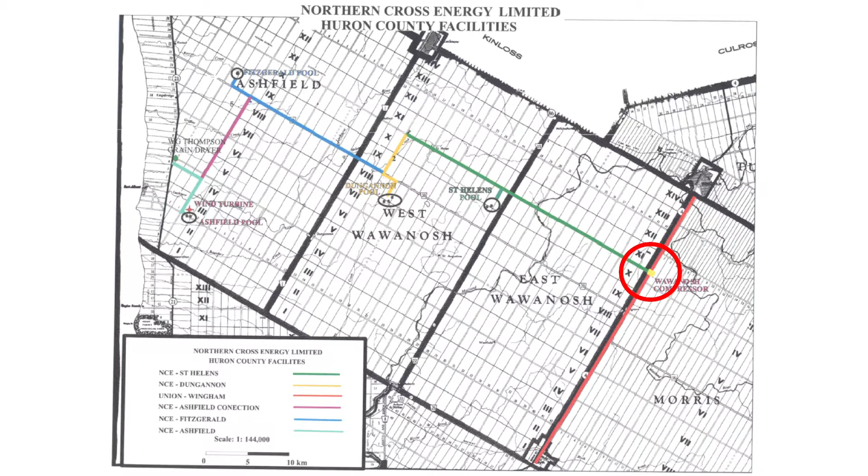It's a two-way metering facility, and we switch depending on the time of year. We do have an end-use customer on our system, which I showed a picture of earlier. What's also interesting is this is the eastern part of Lake Huron, and there's very large-scale wind power development in that area.

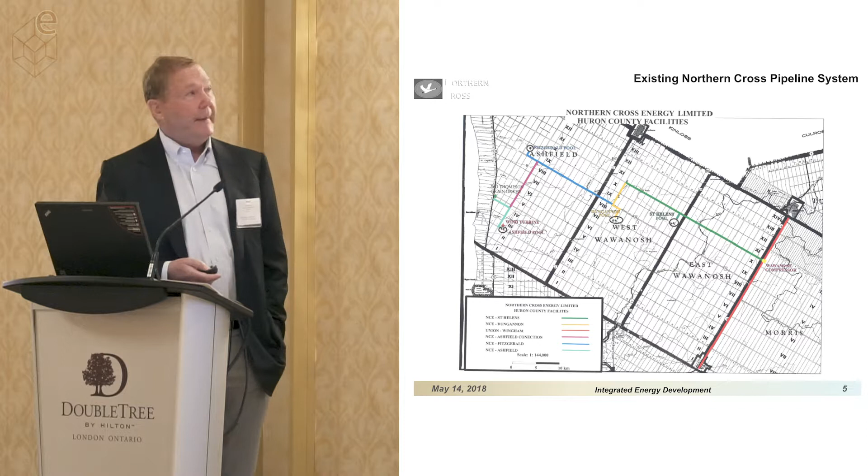So we're in a very large development area for wind power. This is an example of how we can integrate, because Northern Cross was very much involved in the development of wind power in that area. So we're very familiar with intermittent power and renewable energy.

I'll go through this fairly quickly, but we built a cogen in 1992, and that was really as a sales outlet for our gas, because we were islanded. We didn't have other sales outlets, so we thought, well, we've got access to the power grid - we'll take our gas, convert it to electric power, and put it on the grid as a way of marketing our gas. That cogen was one of the first built of its kind in Ontario.

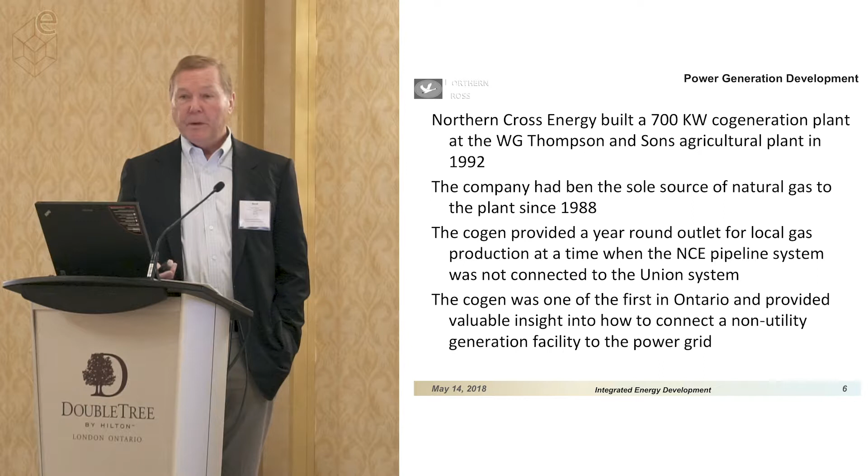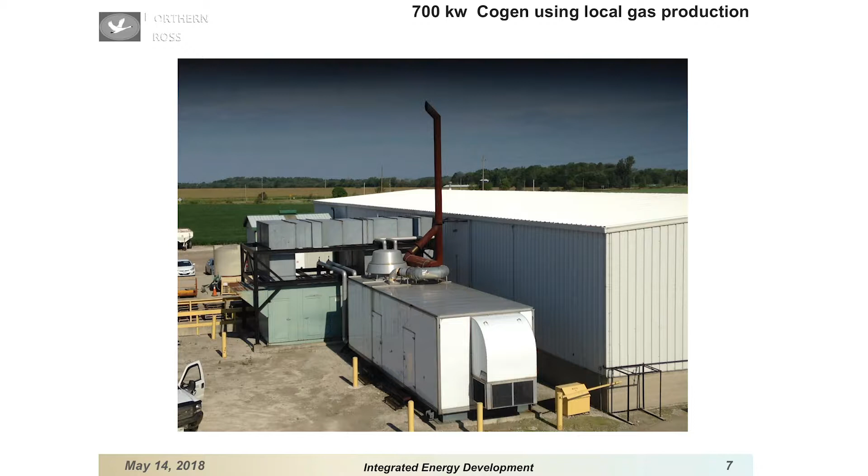It has waste heat recovery, being a cogen, and we gained some insight from building that into how to interface with the electric power grid as opposed to interfacing with the natural gas grid. So that's a picture of the cogen, and it's at the Thompson's - an agricultural processing facility.

Subsequent to that, it became clear to us that there was a growing demand for renewable energy, so we formed an affiliate, Port Albert Wind Farms, and we built what I believe was the first commercial wind turbine in Ontario - not publicly funded. That unit came on stream in 2001 and has been producing for 17 years. So we have some history in the wind power business.

That company was sold to EPCOR in 2005, and the project portfolio that we developed is now a project of about 300 megawatts. So it's a very large wind development, and actually I believe it's the largest wind farm in Canada.

But one thing we found from our experience with the wind business is exactly what we've been hearing about earlier - this is not dispatchable power. In other words, it just shows up. The wind's blowing, the sun's shining, you're getting power whether you need it or not. And initially, people's response to intermittent power was to say, 'Oh, gee, if the wind's not blowing, the sun's not shining, we better build gas-fired generation to back it up.'

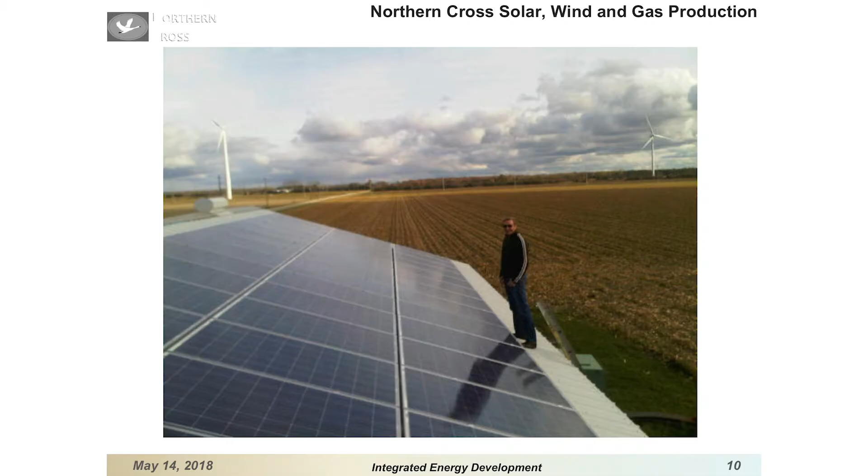So wind and solar development are now common in that area. Very large wind development, quite a bit of solar development along the eastern shore of Lake Huron. There's more than 1,000 megawatts of intermittent power. It's not dispatchable, so you get it whether you want it or not, unless you physically turn off the wind turbines. So there are periodic surpluses, and we've heard about that.

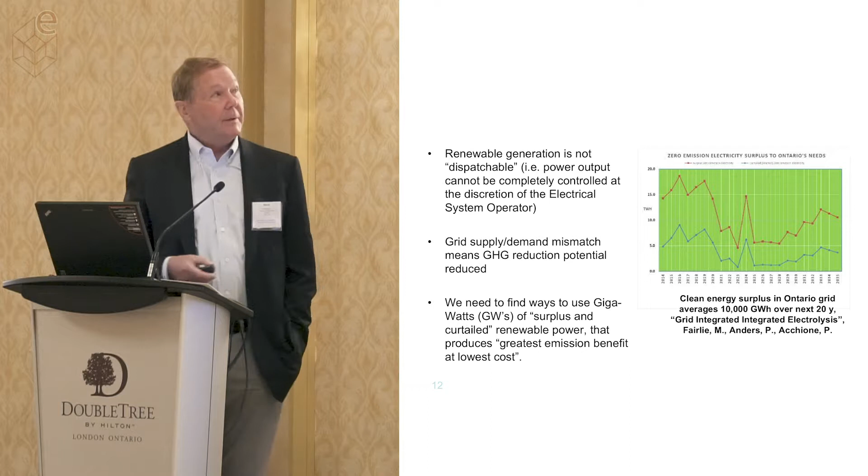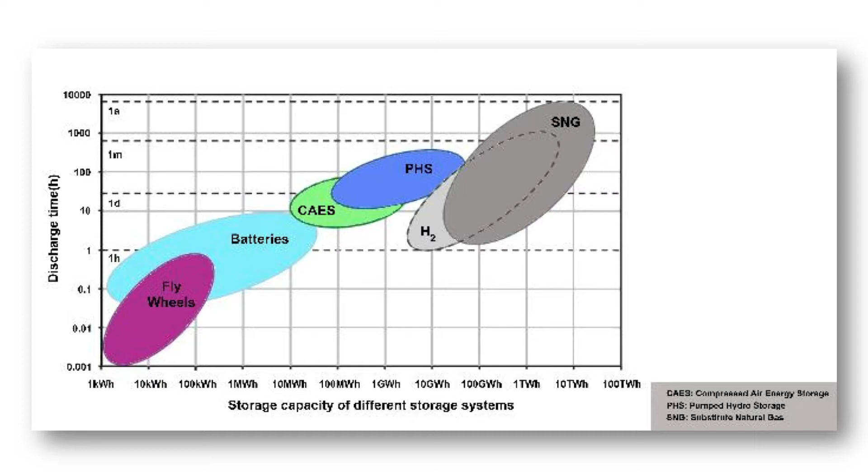Up here: compressed air, pumped hydro. But this sphere in here, which is even larger amounts of energy and longer periods of time, is hydrogen and substitute natural gas. So surplus power can be converted into a gas—either air or hydrogen. And the best way to store that in large quantities is underground, and again, we heard that earlier.

So the two differences really, I think, are: compressed air is a round trip. You take power off the system, you put it back on the system, but the medium is air, which in itself doesn't have any commodity value. I mean, you can't sell air. So you use it as a medium.

Our interest as a producer is the use of porous reservoirs—in other words, we have pinnacle reefs. They are depleted, and if you don't use them for storing natural gas, can you use them for storing hydrogen or for storing air? We know there's quite a bit of work going on with use of porous media instead of salt caverns for storing air, and there's going to be testing and new regs required before you do that. But that's an opportunity we can investigate—repurposing depleted natural gas pools for air storage rather than natural gas storage.

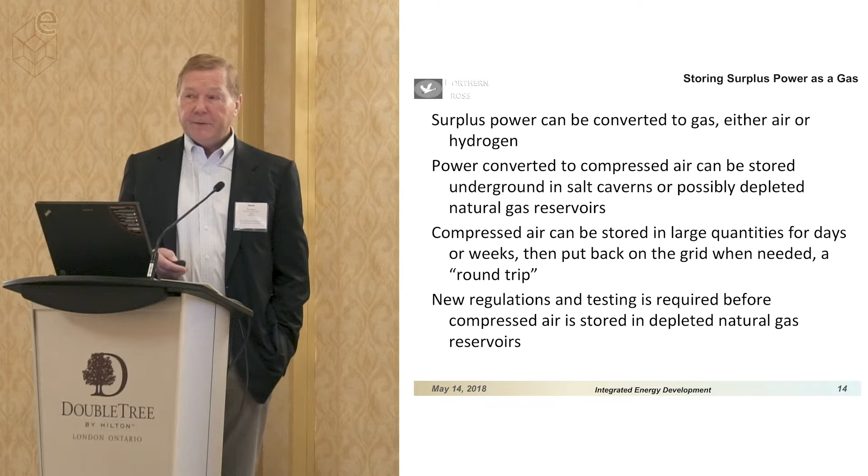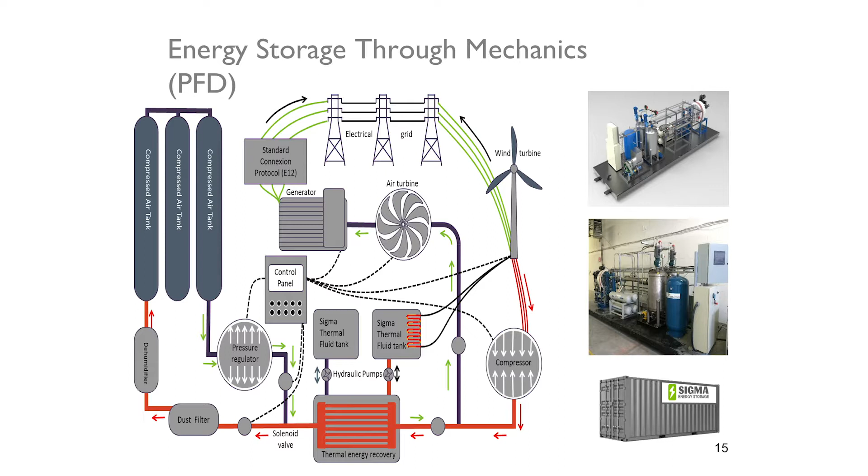This is a schematic of a compressed air system. We saw one earlier, and maybe rather than talk about compressed air, which Eric's done a good job talking about already, I won't get into that. Maybe I'll talk about hydrogen instead, which is a bit more up our alley.

So we can convert surplus power into hydrogen using electrolyzers—they're called water electrolyzers—where you take water and basically separate it into oxygen and hydrogen using electric power.

So we've been developing those over the last number of years and now have commercial units that are in multi-megawatt scale. One of the things we wanted to do, which hadn't been done in the past with large-scale water electrolyzers, is have dynamic response. In other words, they're not designed to run 24/7. You can respond to changes in surplus power and make hydrogen when there's surplus power, and stop making hydrogen when the power is needed for something else.

There are very large hydrogen facilities and industries all over the world, including very large ones in Ontario, mostly in the Sarnia area. The refineries and petrochemical plants use a lot of hydrogen. But interestingly, about 98% of the world's hydrogen is made from fossil fuels. So you take fossil fuels and take out the carbon to recover the hydrogen, but what you're left with is carbon. In separating those from fossil fuels, you get the hydrogen, but your waste product is carbon, which generally goes up the stack, and these are very large sources of greenhouse gas emissions.

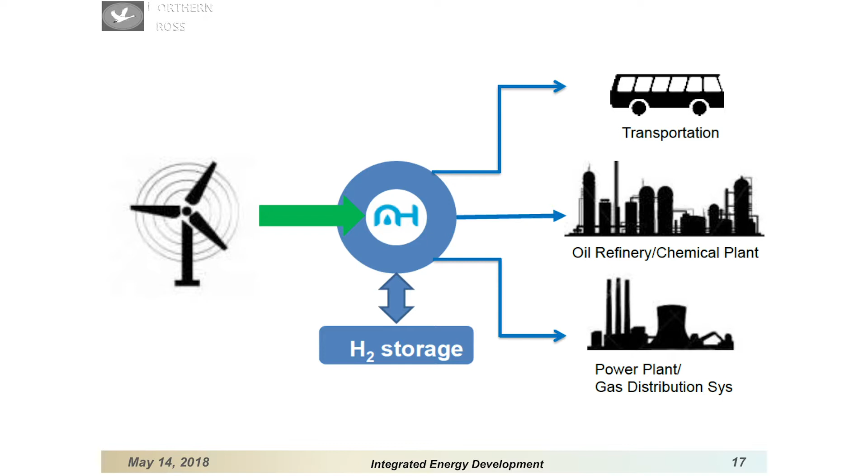So this is the concept that I talked about with wind or solar energy, running it through an electrolyzer, in this case Next Hydrogen, storing it underground, to balance it so you can just use off-peak power and underground hydrogen storage. And then you've got applications for using hydrogen in transportation, refineries, and actually the largest use of hydrogen in the world is for making ammonia for fertilizer.

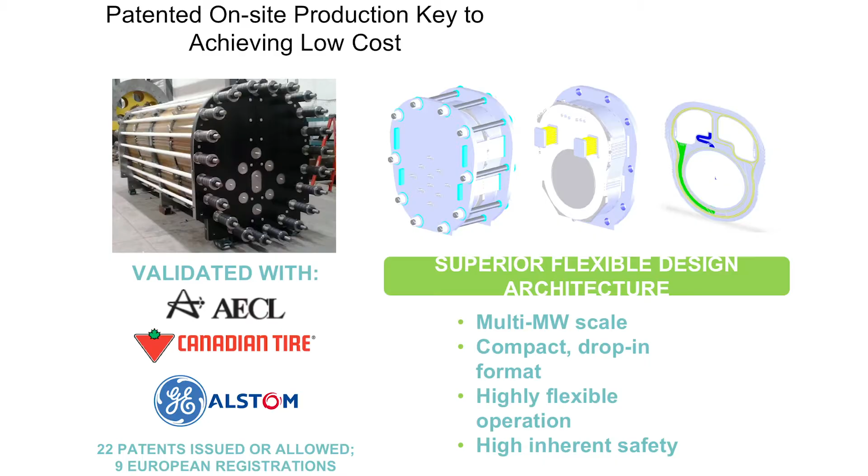So this is what a very large-scale electrolyzer looks like. That was developed by Next Hydrogen, and an idea of the unique cell architecture that we came up with. We've now produced two of those commercially, and our first commercial customer is Canadian Tire. Canadian Tire, incidentally, uses them for their forklifts, where they have very large distribution centers with into the hundreds of forklifts that run 24/7. They, by necessity, are zero emission. They operate indoors, and so they've switched them, interestingly, from batteries to fuel cells.

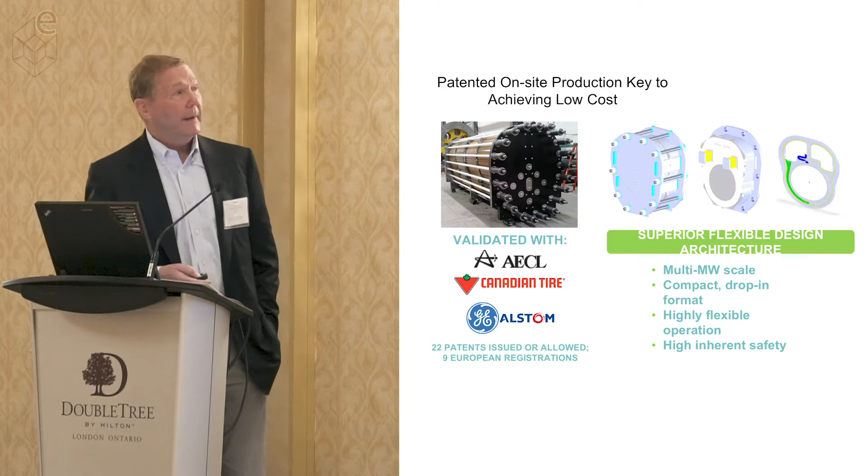So we can use off-peak power to make hydrogen and run these forklifts. But the same system can be used with transport trucks, delivery trucks, buses. So we're working with quite a few companies that are doing that. There's growing demand for zero-emission vehicles. One of the best ways you can reduce greenhouse gas emissions is to displace diesel with green hydrogen.

So we are delivering these units. But interestingly, and this leads me to underground storage, you can mix hydrogen with natural gas. There's a concept that many big companies are involved with, including Enbridge, of what they call power to gas, where you take power off system, convert it electrolytically to hydrogen, and then put it back into the gas system - a mixture of natural gas and hydrogen. In a conventional natural gas system, you can have up to about 10% hydrogen without having to change the facilities.

So that is a bit of a round trip where you take power off system, make hydrogen. Instead of putting it back onto the grid, you put it back into a natural gas system. But another way to look at that - and this is where underground storage comes into it, and Ontario producers are using some of these reservoirs - is you can inject hydrogen into natural gas reservoirs. As I said, you can put it into a pipeline up to 10%. You don't have a similar restriction in storing it underground. So you can store very large amounts of hydrogen underground.

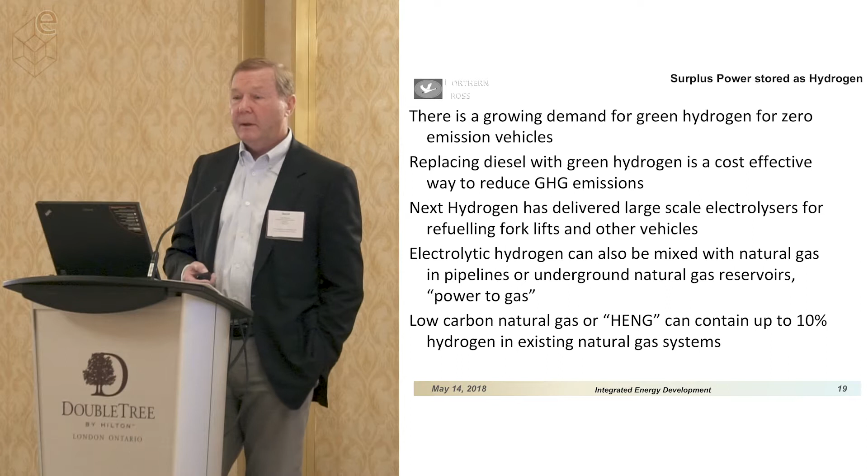One way to look at this, and an opportunity we're looking at with hydrogen-enriched natural gas, is this area I talked about earlier, north of Goderich. This is our existing system, but north of there, in the southern part of Bruce, there is no gas service now, and there's been a number of hearings with the OEB to determine who's going to build the infrastructure, but there will be new infrastructure built in this area.

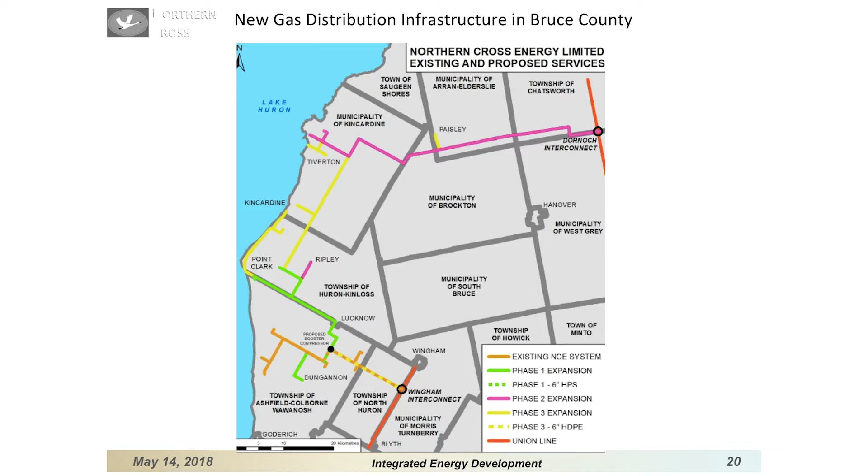So we're looking at underground storage of both natural gas and hydrogen, coming up with hydrogen-enriched natural gas. What we would propose to do is interconnect that with this new distribution system and give them a source of natural gas that is, one, produced locally and stored locally, and two, uses locally produced renewable energy to produce hydrogen-enriched natural gas, which is a low carbon, greener form of energy.

So let's look at the interface of hydrogen-enriched natural gas and underground storage. I think our objective in storing hydrogen is eventually to be able to be a source of pure hydrogen, so that you can deliver it to refineries, petrochemical plants, and have a zero-emission hydrogen source, which right now are very large sources of greenhouse gases. They all have a desire to reduce their carbon intensity, their carbon footprint, and this is a way to do it.

So the interface of the power grid, renewable energy, electrolytic hydrogen, and then end use of hydrogen. In storing hydrogen underground, if you use a depleted pool—in our case we operate 5 pools, 3 of them are likely candidates for storage—we're not on the grid where we could use it for conventional natural gas storage.

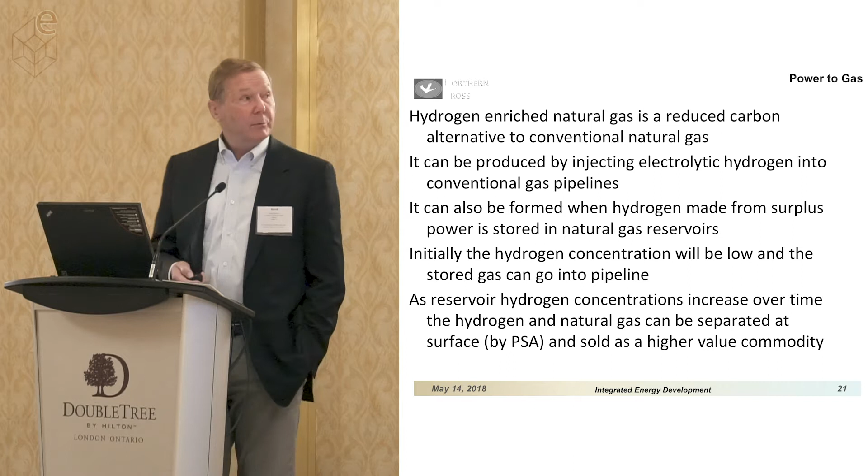Once that gets to be a little higher, you can separate it at surface. Instead of putting it into natural gas pipelines, you can produce pure hydrogen. There's a process called pressure swing adsorption, PSA, that's used in refineries right now, but it's a way to purify hydrogen—you can use it at surface to separate any remaining natural gas in the reservoir from hydrogen.

And then you have a pure source of hydrogen that you can deliver to customers, and that's a very valuable thing. There's a large market for hydrogen all over the world, and increasingly people want to have green hydrogen.

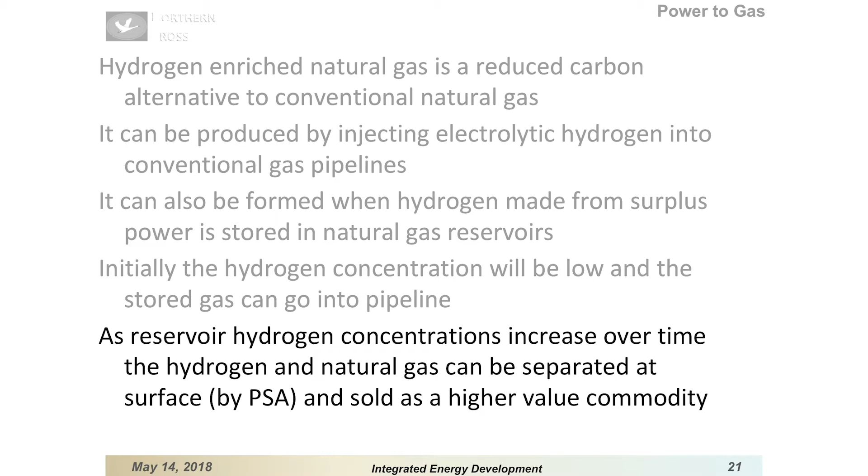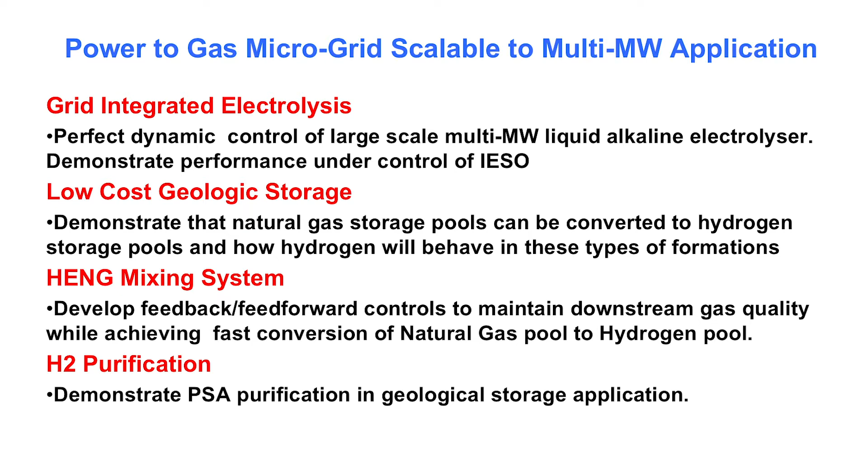I'll go through this fairly quickly, but these are the steps I discussed: grid integrated electrolysis, underground storage, mixing underground of natural gas and hydrogen, and then purification using pressure swing adsorption. So this can be done on a very large scale.

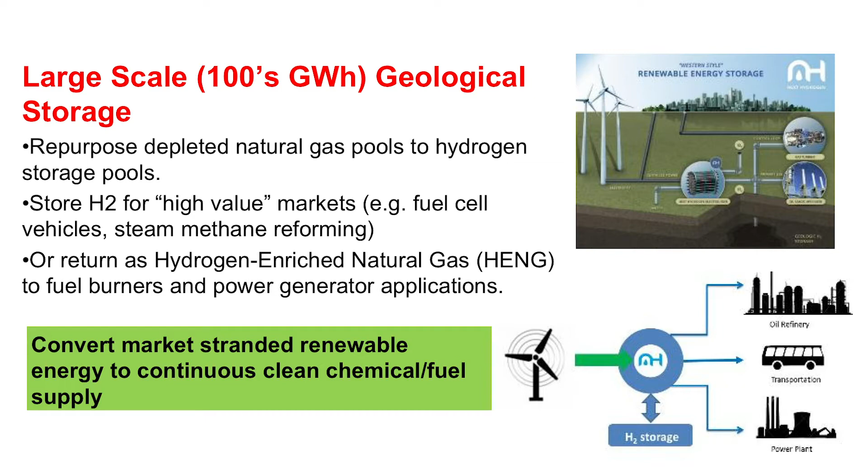Again, I won't get into a lot of detail on this, but I did want to show an example. This is a company in Austria that's an operator of very large natural gas storage systems, RAG. This is a presentation they made, so obviously I'm taking this from them. Using depleted gas reservoirs that they operate in Austria, this is an example of pretty much exactly what I'm describing for Ontario that they're already doing.

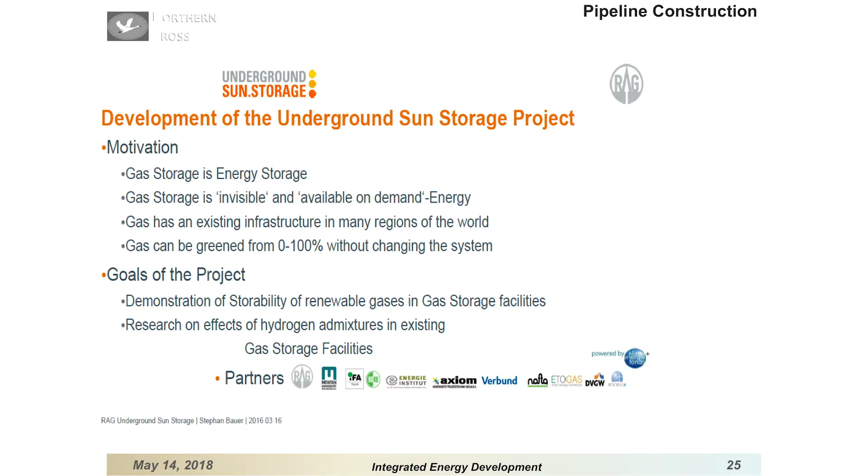So electrolytic power to hydrogen, and then creation of hydrogen-enriched natural gas and ultimately pure hydrogen. This is their presentation, but we found it almost a perfect example of what we'd like to do here. As far as I know, this is the only project in the world like what I'm talking about, but it demonstrates that these things can be done.

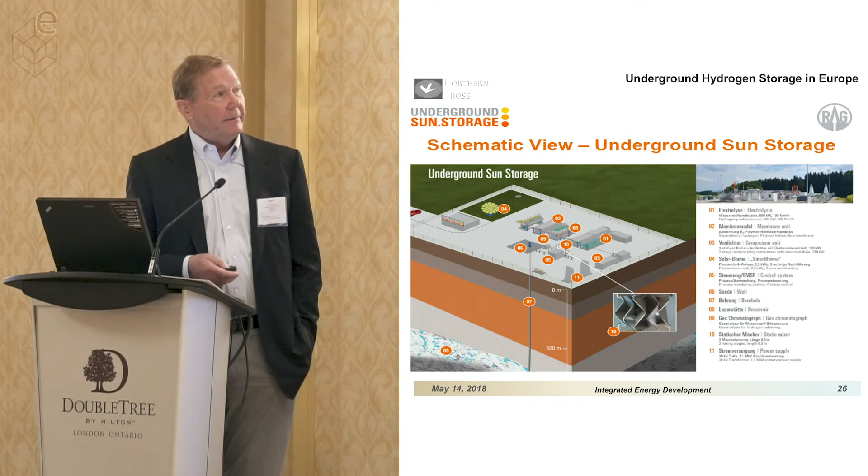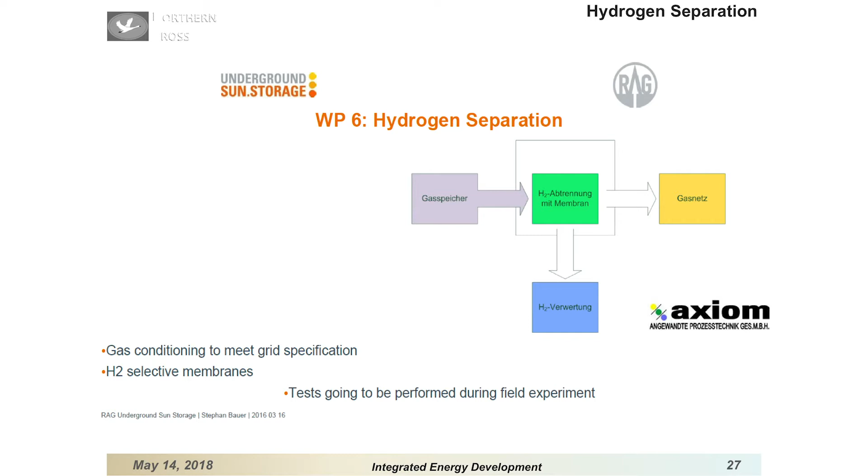storage and hydrogen enriched natural gas going out. They're talking about H2 selective membranes, which is basically pressure swing adsorption. So they're collecting data, and this is a very professional demonstration project. And I guess one thing that can come out of this is, and this is kind of out there a little bit, but directionally probably where the world's going.

I talked about hydrogen economy, growing use of hydrogen. What they found is that when you inject hydrogen into a natural gas reservoir, there's naturally occurring CO2. Most natural gas reservoirs have some component of CO2. But if you combine CO2 and hydrogen under the right temperature and pressure regime, you can create what's called SNG, or synthetic natural gas.

And so you're producing a form of natural gas using CO2, naturally occurring CO2 and hydrogen. What makes this significant is there's a lot of effort, especially in Western Canada, being spent on carbon capture and sequestration. So if you have large volumes of CO2, which they're doing right now, capturing it and injecting it underground,

and so if you, and this is pretty conceptual, but this is the direction the world's going, is if you take renewable hydrogen and inject it into a CO2 reservoir to produce synthetic natural gas, and then you produce the synthetic natural gas and burn it, and then capture the carbon, sequester it, it's a

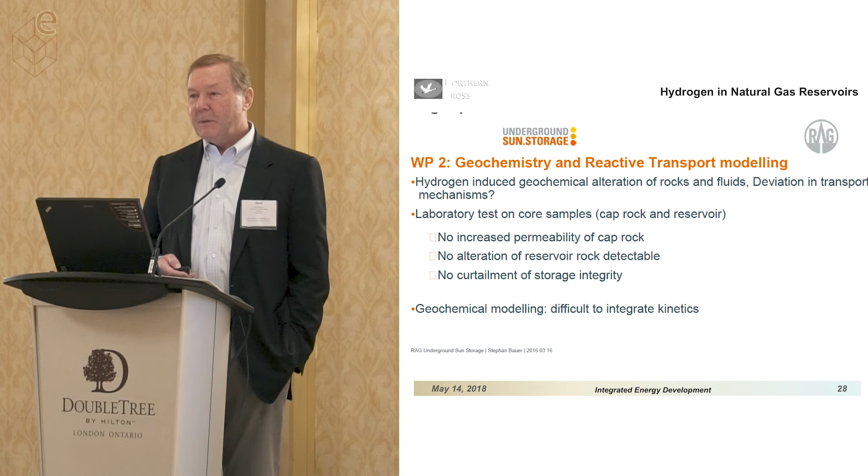So surplus power can be stored underground, and it could be compressed air, it could be hydrogen, or a hydrogen and natural gas mixture. And we talked about the progression of these, how you can go from hydrogen-rich natural gas to really your ultimate goal is just pure hydrogen.

We operate depleted, substantially depleted pinnacle reefs in Huron County. We're not the only ones. There are other pinnacle reefs that could be developed for storage of hydrogen or potentially natural gas. This would be subject to some pilot testing, and obviously new regs will be required.

What's interesting is that this area is, as I said, very thin natural gas grid, very strong electric power grid. So how can we, as a producer, interface with the power grid more so than the natural gas grid?

In this case, compressed air energy storage makes the most sense where there isn't a local outlet for hydrogen. So what I would suggest is that the areas that are close to Sarnia, close to refineries, close to places where they use a lot of hydrogen, you're probably better off storing hydrogen underground and trying to come up with this pure hydrogen source that I described using underground storage.